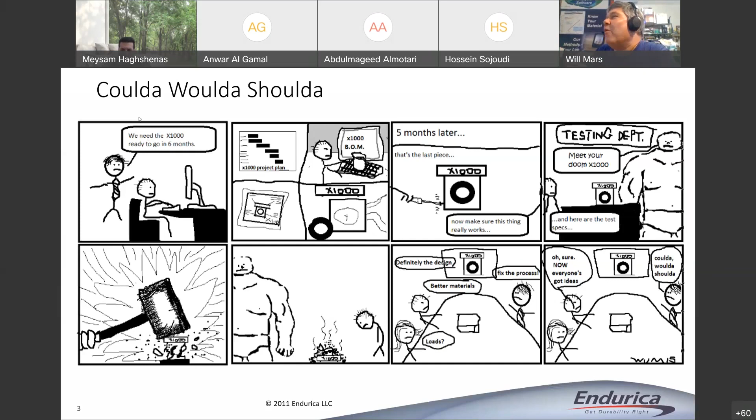Because otherwise, when you get to this meeting, now you have to go back and do another iteration, and that's expensive, and nobody likes that. So anyhow, you don't want to be in the coulda, woulda, shoulda, right? You want to get it right the first time.

Now, the other real world experience, I guess, is that every project that you're ever going to have is going to come with limits, right? And I just picked off some funny cartoons from the internet here that kind of illustrate this, right? Your client expectations versus your client budget. What kind of weapon do you bring to what kind of situation? It's important to bring the right tools to the right situation, let's say.

And of course, there's always going to be a deadline where, if it takes you longer to do the development than the schedule allows for, there's going to be problems. So the question is, well, how do you go about sort of aligning the objectives that you have in a development program against the activities that you need to do, the kinds of analyses, the kinds of testing that you need to do?

And what I want to say is, hey, in fatigue design, there's a huge range of tools in the toolbox, and so we need to think about the design intent and the requirements. That's basically going to be your budget and your deadline, right? And it's going to be the functional specification on what your product needs to do, and then we can break this down further into what are we going to do from the perspective of describing the behavior of the materials.

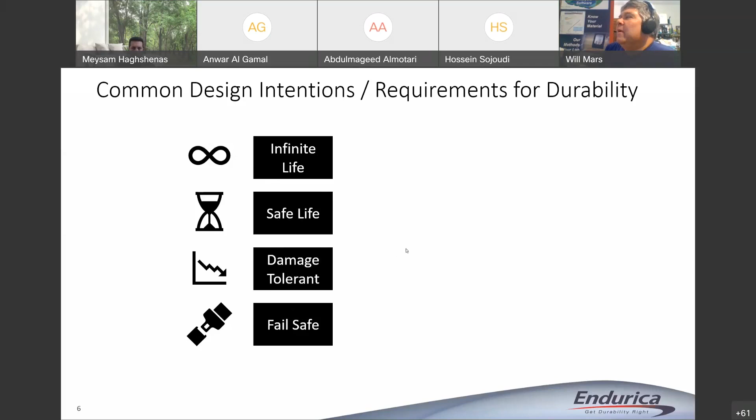Now, the simplest one is the infinite life approach. And in the infinite life approach, what we say is, hey, look, when we design this thing, we are not going to allow for the possibility of damage. And so in order to use this approach, we need to know, first of all, what's the fatigue limit of the rubber, right? There's some load below which, if you keep the load below a certain limit, then cracks don't grow ever.

Now, in order to apply this, you need to know what that limit is, and you also need to know C naught. So C naught is the crack precursor size, right? All materials contain initial cracks in the microstructure, and so if you're working with rubber, and if you know this fatigue limit, if you know the precursor size, that puts you in a position to calculate basically a crack driving force, right? An energy, if you've taken fracture mechanics, energy release rate is what we use. And you can compare your energy release rate to that fatigue limit.

And if your driving force on the crack is below the fatigue limit, then you have infinite life. And you can calculate this safety factor S, right? It says, hey, I've got a margin of 2 times relative to infinite life, or I've got a margin of 10 times, and then you're done. And like I say, cheap approach, because you only need to test one or 2 things. Your finite element model only needs to look at the worst case loadings, and what you end up with is just this simple measure S.

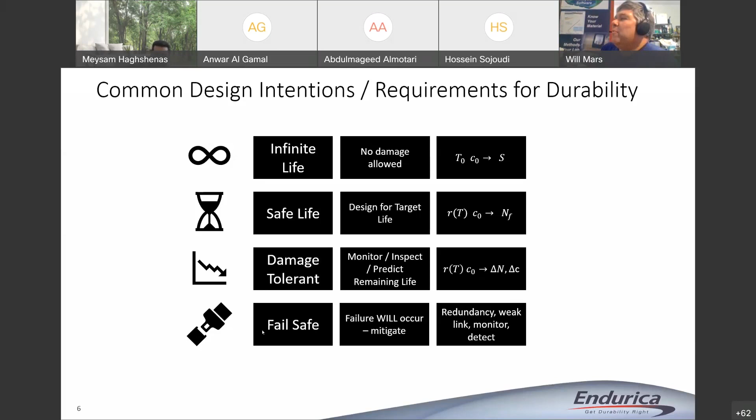Now in rubber, I'll just briefly, one of the things that makes rubber different from metal in terms of fatigue parameters is material behavior. And so, like I say, you sort of have to sort the material behavior into categories of, well, there's some things that you always need to know for every single analysis you might ever do. And there's other things that maybe you only need to know in certain applications, right? So for sure, the basic mechanical behavior that we would always want to know is stress strain behavior.

So, in rubber, we're very concerned with the nonlinear elastic properties of the rubber. So we use hyperelasticity. We're concerned with steady state cyclic behavior when we're working with fatigue. We're also concerned with what I call the core fatigue behaviors. So basically that would consist of a crack growth rate curve, and it would consist of a crack nucleation curve. So we do both of those kinds of experiments in order to prepare for doing analysis, and that's kind of the basic level.

And then on top of that, you can add what I would say is common behavior, but you don't always have to think about these things. Sometimes in certain applications, the thermal dependence, rubber can, if you cycle it fast, it can self-heat. And so sometimes you have to think about that. Sometimes you have to think about the dependence of the crack growth rate law on temperature. So those are things that can be characterized.

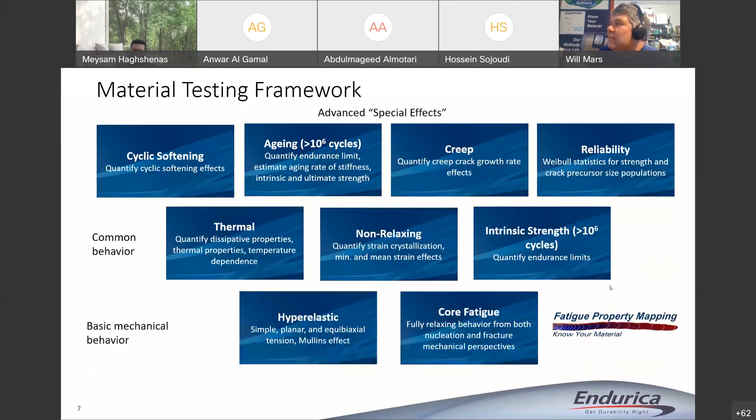But so you might start off with the basics, and then depending on the objectives and the budget, you might add these other things in as part of your study of how the material behaves. Now here's a list of what material characterizations you might do in each of these categories, right? So I've color coded these. Things that are green are kind of like bare minimum. Things that are yellow are things that you could add at an advanced level.

So, for infinite life, you need to know stress strain behavior and intrinsic strength. And maybe if you want to add to that, you could also look at reliability. If you're doing a safe life type of analysis, you're going to have to know more about the material. So here we need not just the fatigue limit, but we also need now the crack growth rate curve, the crack nucleation curve, and then maybe some of these other effects, right? Thermal effects, crystallization effects, creep, for doing safe life.

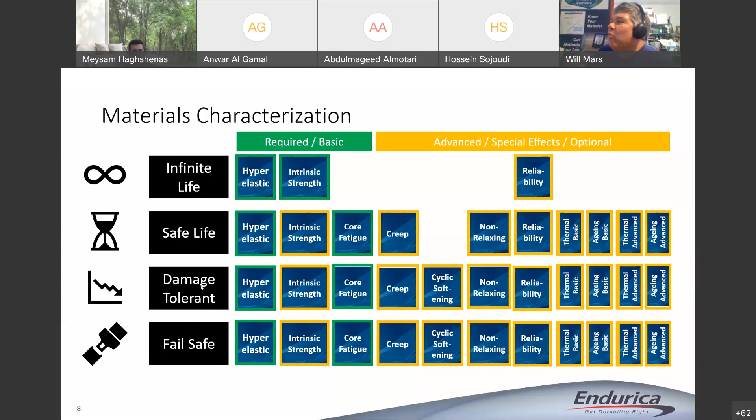If we're going to do damage tolerant, now maybe we have to take into account the cyclic softening, because the material is going to get softer, which means I have to recompute my stresses and strains on some kind of incremental basis, right? Every 100,000 cycles, I have to update my finite element model to reflect the fact that the stress strain curves have become softer. And so you can sort of see how these different characterizations get more complicated and scale up as you adopt more and more sophistication into your analysis.

So now, that was just materials testing, we also have to think about analysis tools. And of course, if you're doing this kind of work, you're probably using a finite element solver like Abaqus or ANSYS or MSC Marc. Those are not our tools. Our tools are these tools here, CL, DT, and EIE. Those are the Endurica software products. And each of these tools has a different workflow.

The CL workflow is the workflow that we use if you give me a duty cycle, and if you ask me how many repeats of that single load case can the part endure, that's the situation where I'll use the CL solver. It was the very first solver that we wrote, and so that's kind of the basic tool set. The next one is our incremental solver, and we call it DT. It should make you think of like an increment of time, right? Delta T.

This is the workflow that we would use when we have to accrue damage across different load cases, right? With CL, I can only have a single load case. With DT, I can make a schedule of cases, and I can accrue damage as you go further and further into the problem. DT also allows you to do a co-simulation, which means that you can sort of iterate between your finite element solver and your fatigue calculation, so that you can update stress strain fields based on how material properties are evolving as cycles accrue on the part. So those are things that we can do with DT.

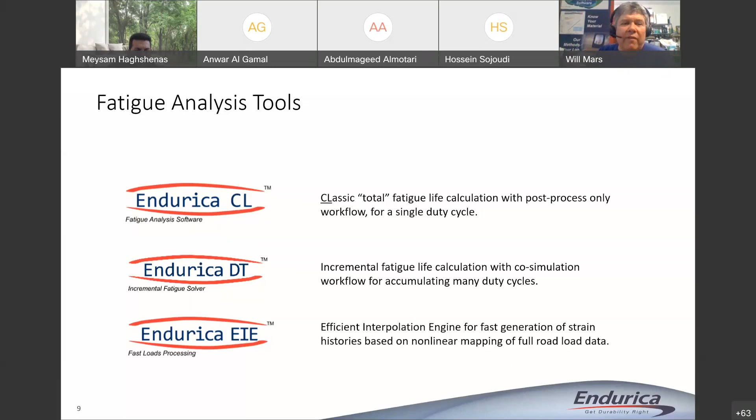So very powerful tool, and yeah, those are the 3 things that we use. And here's kind of a chart that shows how these different workflows map onto the different levels of analysis depth. So if you're doing the infinite life approach, you're probably just going to stick with CL, because you're probably just going to calculate a safety factor.

If you're doing safe life, maybe you'll use CL, because you can get repeats of a single load case, but sometimes you're going to want to model what's called a block cycle schedule, which is, again, you sort of say, here's load case A, so many repeats, load case B, so many repeats. You specify that schedule, you run the part through that schedule, and at the end of it, you say, oh, it didn't break yet. How many repeats of the whole schedule can I run? So that's still a safe life type of thing, and you can do that with our incremental solver.

With the damage solver, like I say, you can do this incremental style of analysis so that you can monitor the growth of defects in the part. You can also use DT to look at residual life in the part, right? So another type of problem is, hey, here's the history that's happened so far. If I assume that this is going to happen in the future, how long will it last? That's what we call residual life, right?

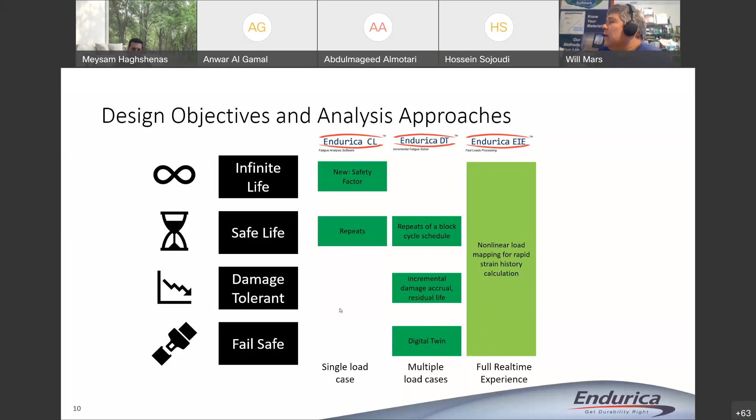And then finally, if you're trying to do a digital twin, then you want to do this with our DT and our EIE tools. And what's beautiful is these tools run fast enough, especially with EIE, that you can actually do this in real time these days. Okay, so that's kind of an outline of everything.

Here are some of the scoping questions. As you're deciding which pieces of these you want to bring together, you're going to say, what's the implication of a failure, right? Because what you're looking to do is economically justify the activity that you're going to do. And so the first thing to say is, well, if this thing fails, what does that cost somebody, right? Sometimes if it's a little rubber grommet that fails, well, it's a $1 part on a dollar problem and nobody cares.

Other times we've had projects where there's a rubber part that's off in the middle of the ocean, and if it fails, they have to send a ship out to change the part. And if you can imagine sending a ship with a crew and all of the equipment it takes to change a rubber isolator on an oil platform, you're talking multi-millions of dollars. So that's one of the first questions to ask when you're trying to scope what is justifiable.

You also want to think about opportunity costs. What's an example of that? It's like, if we do this, maybe that opens a future possibility that has a lot of value that could be realized. And so sometimes opportunity costs are important to think about.

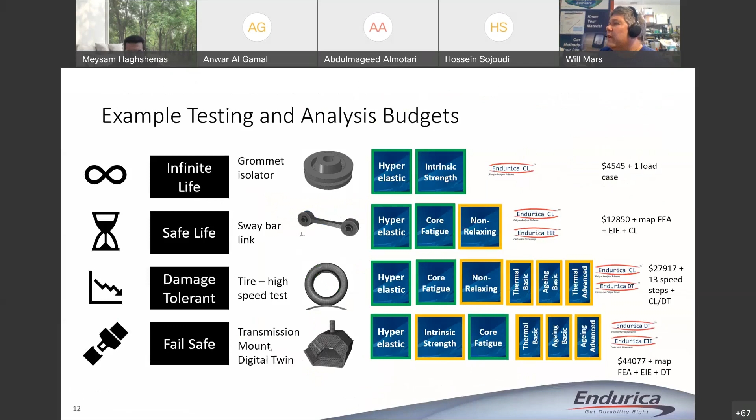And then finally, I want to show you an example of what a digital twin could look like. It's kind of academic at this point, in the sense that we actually haven't sold that. I'd love to find a customer who wants to do it. A lot of people are talking about this these days. I think in the future we will see more digital twins coming, and we've built a prototype one that I'll show you here, but certainly possible to do. And the example I'll show you is for an automotive transmission mount.

Okay, so talking about infinite life. This is a picture of rubber's fatigue crack growth rate curve, right? On the high end, you have the strength of the material Tc. On the low end, you have the fatigue limit T0. And in between, you've got this green curve that controls, for a given fracture mechanical energy release rate, what is the rate of growth of the crack. Now if you're in the infinite life approach, the only thing you need to know is this lower bound, right? I don't need to know anything about the rest of the curve. I just need to know that lower bound, and I need to make sure I'm below it.

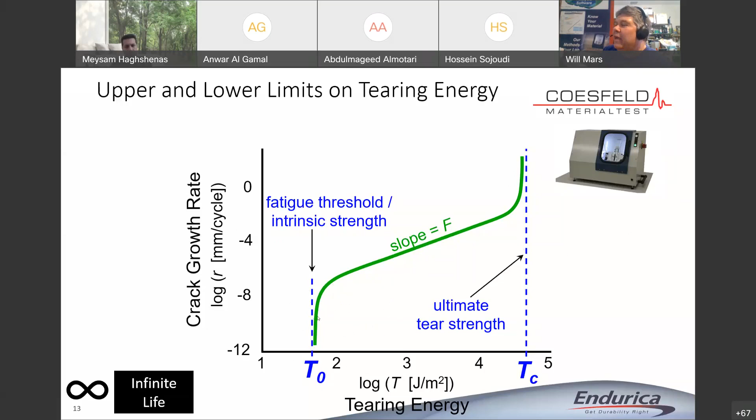The way we do that is on the analysis side, we use an analysis method called critical plane analysis. The idea in critical plane analysis is, loads can be very complicated. A stress tensor has 6 different components, and so as you're feeding loads into a part that are coming from multiple directions, the question is how does a crack on a particular plane experience those loads? What you do is you resolve the stress tensor onto that specific plane, and you look at the history of the traction vector. And from that history of the traction vector, you can find what's the worst case.

And you can compare that worst case to the crack precursor size. So in the infinite life approach, we make this calculation of the traction vector on every plane. We scan over every single possible plane, and we calculate a safety factor on every plane. And then the plane that gives you the smallest safety factor, that is the safety factor that we report as the safety factor of that particular element.

And we do it for all the elements in a model, and that tells you whether your part is going to pass or fail that particular set of conditions, right? So this is just the critical plane search, scanning through different possible crack orientations.

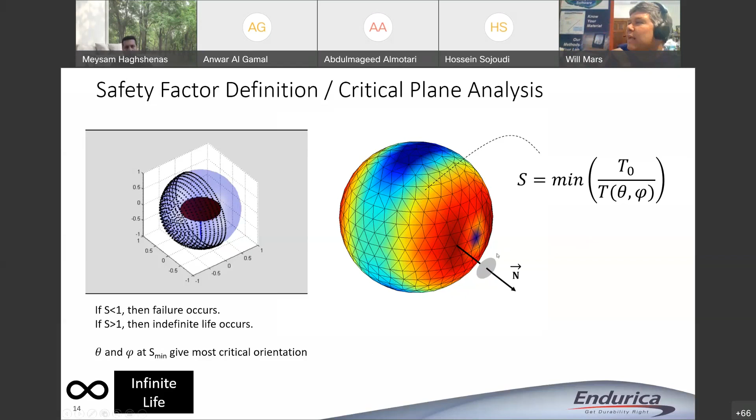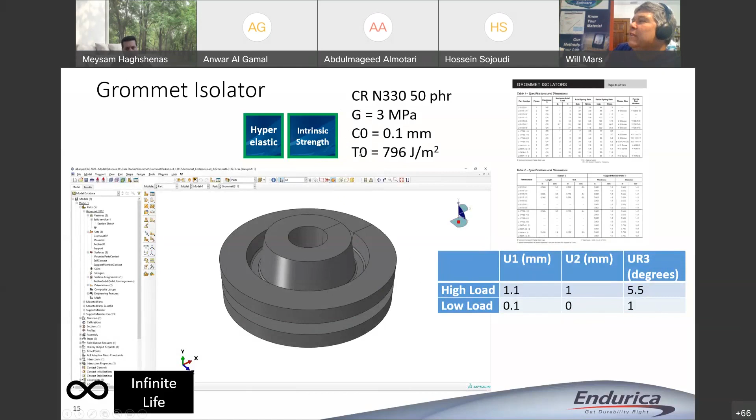So here's my grommet example. In this case, we're going to model 2 loads. One is going to be at a low load, and one's going to be at a high load. We're just going to measure the stiffness of the rubber, the precursor size of the rubber, the fatigue limit of the rubber. We feed that into these calculations, and here's what you get.

If you see red, that's a safety factor of 1.0. If you see black, that is where the safety factor is below 1, right? So that's not infinite life. Everywhere else is infinite life, and blue is a very large safety factor. Red is just on the line.

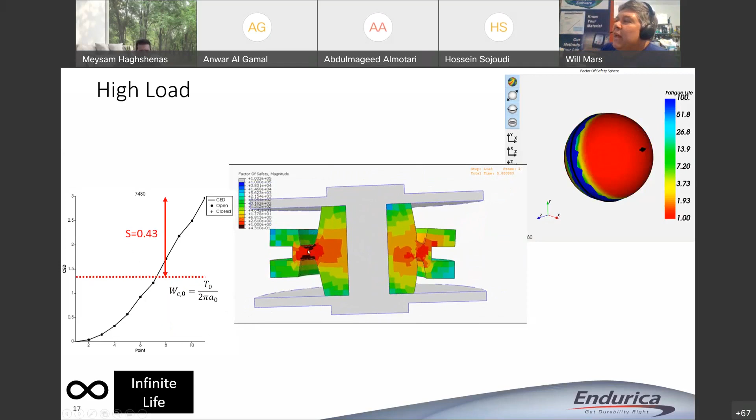life limit. If I repeat the analysis for the high load case, now you can see I've jumped over the fatigue limit, and I've got a couple of elements here that are colored black, and those elements have a safety factor of 0.43. So this doesn't mean that the part has failed instantly, but it does mean that the life will not be infinite. And this does not tell you how long the part will live.

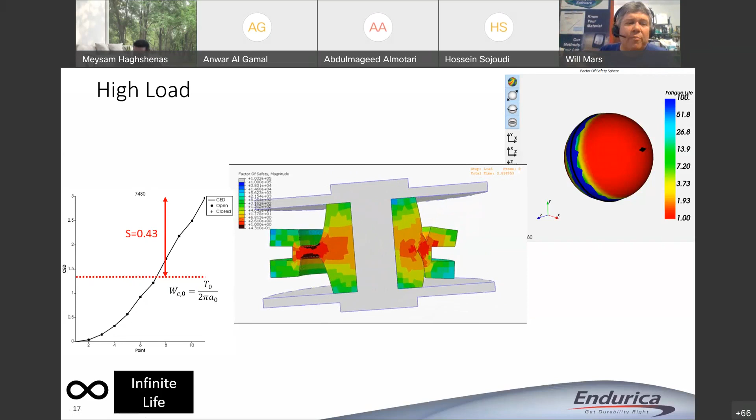If we see the black elements, that means maybe we need to do the safe life approach, or redesign the loads or the part or something. Right, so that's a little bit about the infinite life approach.

Here is the sway bar link. And we're going to do a safe life analysis on this. So here's an example of the material characterization we might do for this, right? So we have stress strain curves, we have fatigue crack growth rate curves, we have a crack nucleation curve.

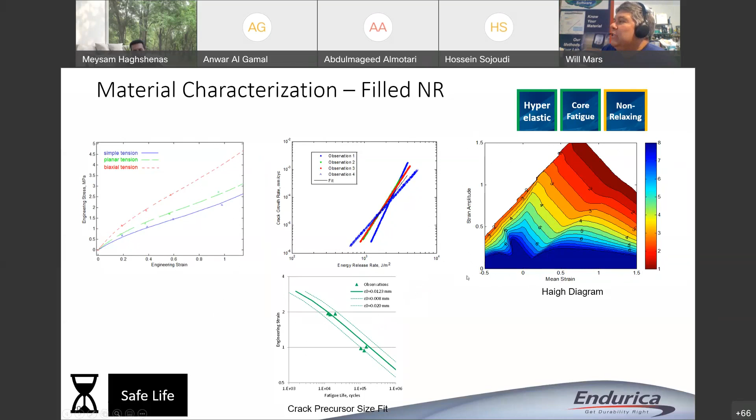From these 3 pieces of information, we can computationally generate rubber's Haigh diagram, which is a map showing how the fatigue life depends on the applied mean strain and the applied strain amplitude. That's the materials characterization that we would do.

And if, for example, we wanted to model a uniaxial load, right? Since this is just a link, this link gets loaded uniaxially. So we can just look at the displacement history, maybe from a road load recording. Now, since these are road loads, we don't want to feed this road load directly into the finite element model, because that would just take way too long.

What we're going to do instead is we're going to compute a map, right? So we're basically going to take the part, we're going to load it from 0 to 4 millimeters of displacement. And in this case, we're going to do that in about 8 increments. Those 8 increments of loading create a one-dimensional map of the relationship between stress strain fields in the part and force displacement input to the part.

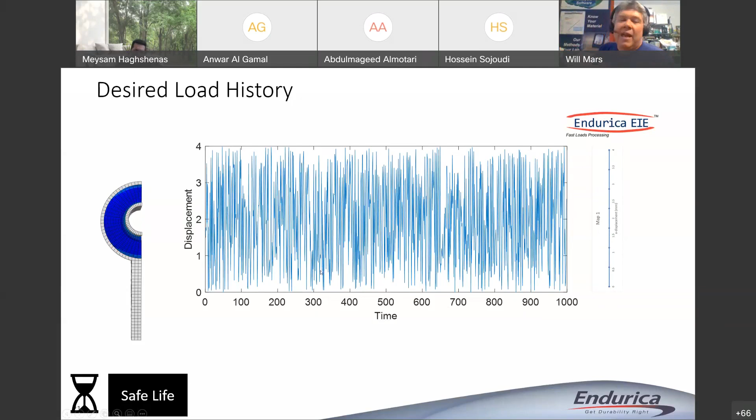Once we have this map, the EIE tool can say, okay, for any point on this history, if I'm here, I'm just going to look at these 2 load cases and I'm going to interpolate between them, right? So then to generate this, I'm going to use my map. I'm going to sort of remix it, interpolate it, and then generate this big history. And I can use that for my fatigue analysis. And if I do that, I get some sort of life.

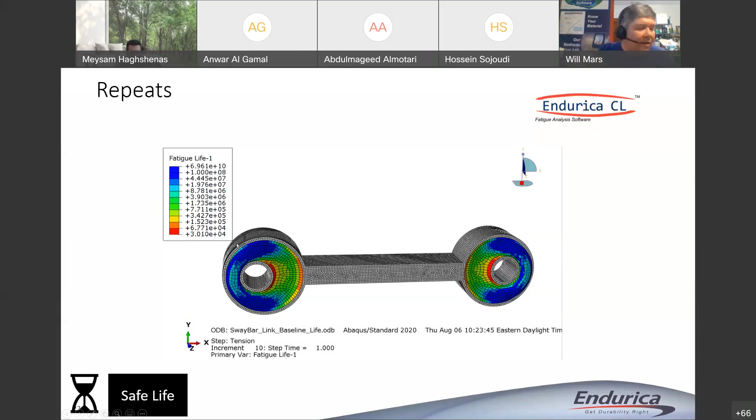These are life contours on the part under that road load history. In this case, we get a life. The failure is going to be near this inner metal contact point, and it's a life of about 30,000 repeats of that event at the track. So that's an example of a safe life analysis on the link.

Here's an example from the tire world for the incremental analysis. This is the FMVSS procedure and the ECE. By the way, there's 2 procedures here actually. The first is the FMVSS, which is if you want to sell a tire, you have to pass the first 4 steps, right? If it doesn't pass the first 4 steps, that tire is illegal in the United States.

Now, in addition to those first 4 steps, there's a European test standard that tire companies use to assign a letter grade to a tire. If you buy a tire that has one of these letter grades at the end of the tire nomenclature, that is an indicator of what's called the speed rating of the tire, right? So if you have a Q speed rating, that means the tire was able to pass 160 kilometers an hour. If you have a Y speed rating, the tire is fine up to 300 kilometers an hour, right? You better be on the Autobahn for that one. But so the question is, can we model this?

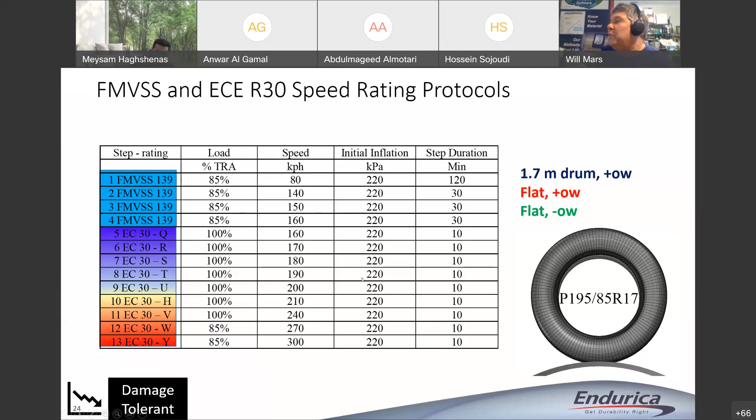And yes, to do that though, we're going to need to use an incremental analysis where we say, okay, run this load case for 120 minutes, and then run this load case for 30 minutes, and this load case for 30 minutes, and so on, up until the tire lets go, right? When the tire lets go, that basically gives you your letter grade for the speed rating. And we can simulate that.

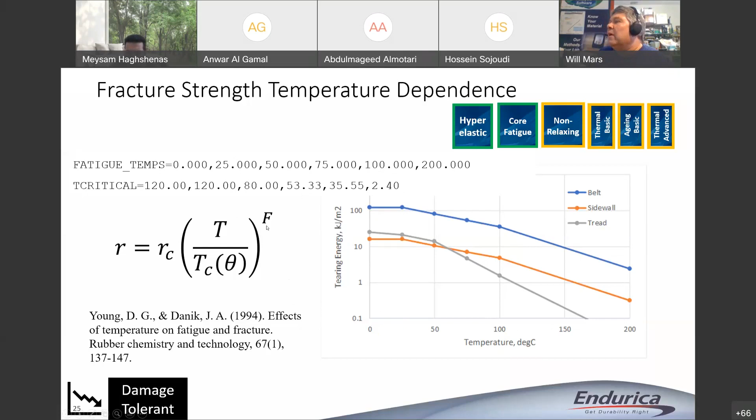But once you hit about 210 kilometers an hour, you start to have some really interesting dynamics, because in a tire, you get what's called a standing wave, where the rotation speed of the tire corresponds to some natural frequencies in the structure. And you actually, at steady state, get these standing waves, very destructive to the tire, because prior to a standing wave, you really have one deformation cycle per tire revolution. Once you get a standing wave, you get multiple cycles of the rubber per revolution of the tire. Very damaging, and this is where you'll see a large amount of self-heating.

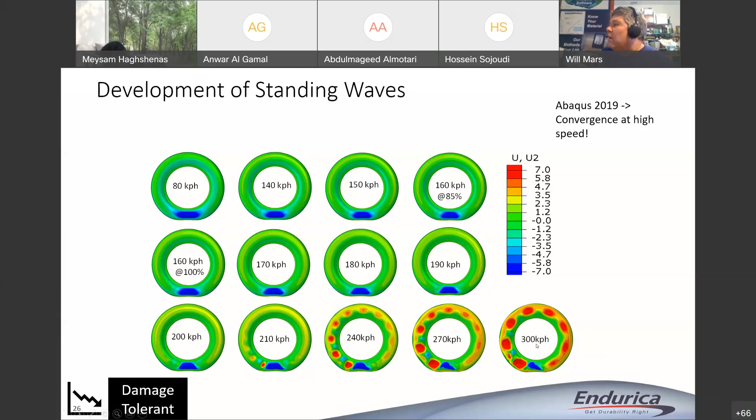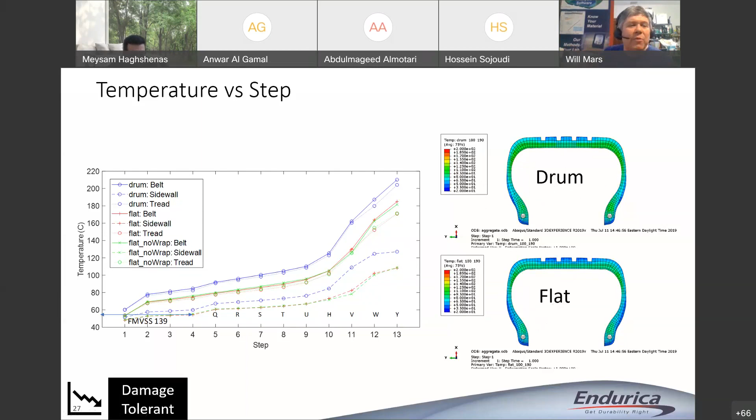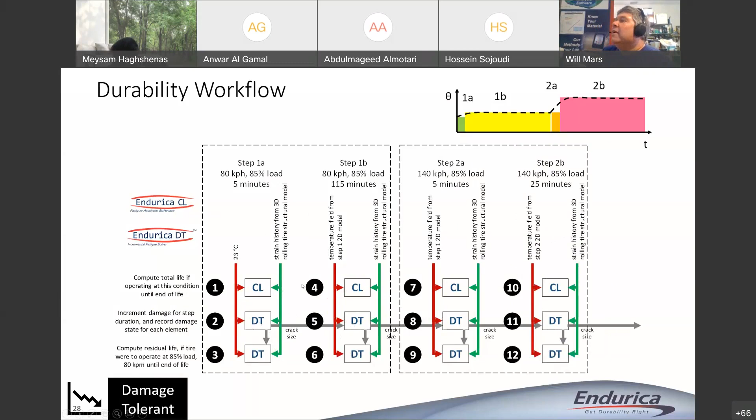This is the workflow, and I don't dare try to explain it. You know, the incremental workflow does get a little bit complicated because you're kind of starting and stopping. You're saying, well, do damage for this step, and then take the damage state of the tire and do another step, and the end of that step becomes the beginning of this step, and bring all the temperatures in, and it gets intricate, but it can be done is the point.

And here's kind of the final result when we follow that workflow. What we get is a plot of residual life as a function of time into the sequence of tests in that schedule for the FMVSS and for the speed ratings, right? So if you survive for the first, what is that, 13,000 seconds, that means you've passed the FMVSS 139, and then you can see these are the points where you pass the Q, the R, the S, the T. Now in this case, these models were failing at the H and V speed steps in the procedure.

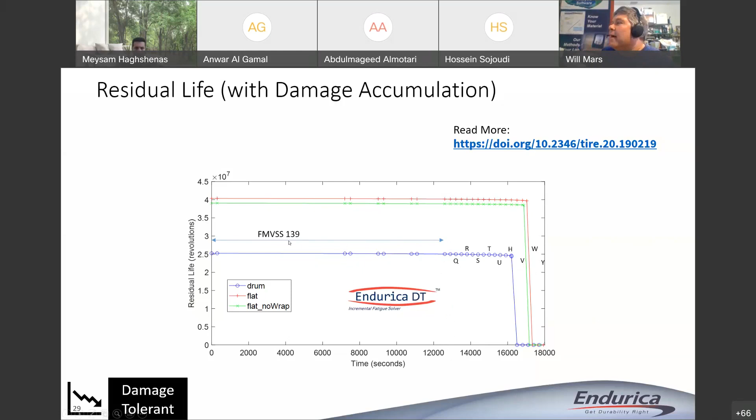Interesting prediction of speed ratings in tires using our fatigue technology. Last example for the fail-safe approach. This is an example where we've implemented a digital twin of a transmission mount, an automotive transmission mount.

And the way the twin works is basically you have a car and a data acquisition system that's measuring force and displacement inputs to the transmission mount. We're going to use EIE, right? This tool that interpolates loads. We're going to take those real-time loads, and in real time, we're going to convert them into strain history.

And then we're going to use the incremental solver to take that strain history and say, okay, over this 1 minute of strain history, how much damage happened? We're going to update the damage state of the model, right? We're going to accrue the actual damage, and then we're going to do a second calculation.

We're going to say, okay, since I've accrued this much damage, what does that mean in terms of change to the residual life under some hypothetical, right? If we say we measure the life of the part in terms of 100% load, we can compute the residual life. So we do these two calculations in real time, and then we update a dashboard where I show maybe a driver or a fleet manager, here's what the damage on your part looks like.

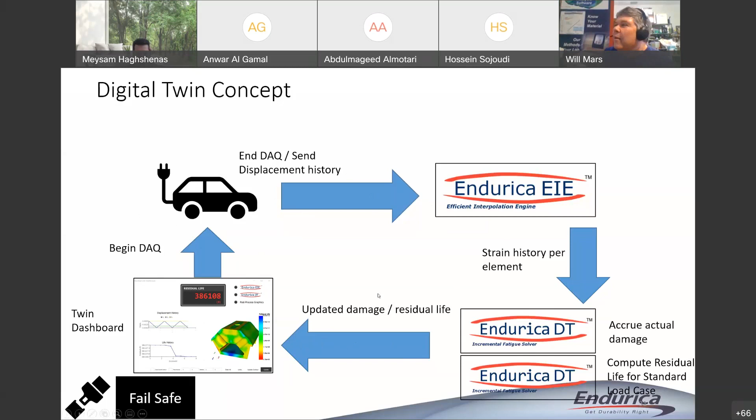And now, of course, this basically happens on a periodic basis, so every minute or every hour, you update this calculation loop. And so you basically have a running dashboard of the state of your part. And if you accrue enough damage that the part is going to fail tomorrow or next week, you can send an email to somebody and say, change that part out. So that's an example of a predictive maintenance system or a digital twin.

And so now, in order to use EIE, first we have to pre-compute the solutions that we use for interpolation. So this is a picture of a final model going through the motions that are used to pre-compute the interpolation grid, right? So basically you make a model of the mount and you run it through every possible deformation state that might happen in the application, and that's your map. Now that's a thing that you do before you get to the field and start operating the twin. Once you've done that, then you're ready to go ahead and start the twin.

I guess the other thing we need to do is, so first of all, we have to pre-compute the map. Second of all, we have to initialize the residual life, right? So how do you measure residual life? Well, you pick a standard load case and you say we're going to measure residual life in terms of repeats of the standard load case.

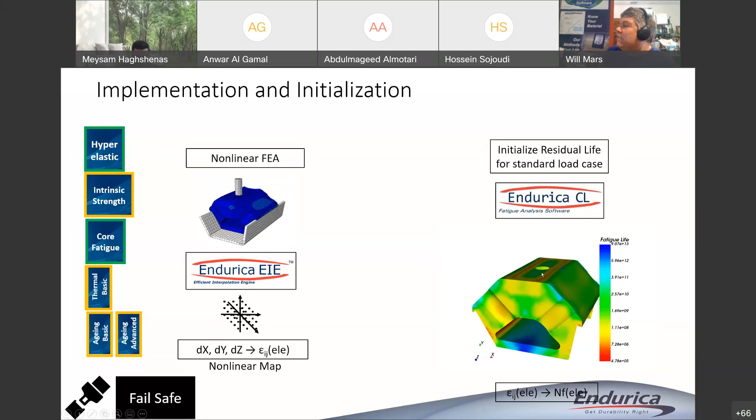So the first thing we're going to do before we accrue any history, we're going to say what is the fatigue life of the standard load case before we've accrued any history. So we need to initialize that before we start the twin up. And this is a contour plot showing the fatigue life on the mount of a load case where we're just doing vertical vibrations, right? We assume the major thing going on are these vertical vibrations. So now that we've initialized that, we can get in.

But if you're interested, go to the Endurica YouTube channel and look up Digital Twin, and you'll find this demo on our YouTube channel. Basically, we feed in real-time loads, and this map of damage updates in real time as we feed in snippets of loading. So you can see that, and you can see the computational requirements of the twin prototype.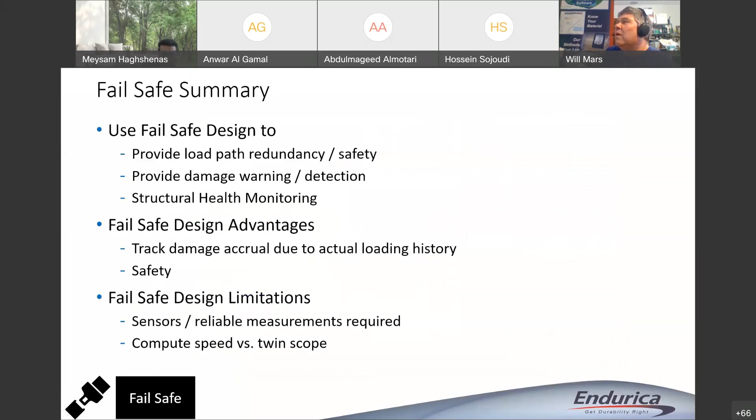So yeah, so these are the approaches, and you can see that we've gone from very simple to very sophisticated, and hopefully you can find something that matches what you need to do. So I will stop there and open up for any questions or discussion that you guys may want to have.

Perfect. Thank you so much, Dr. Mars. Excellent presentation. I personally loved it because my mindset is all about metals and alloys. Very informative to me. I learned a lot. Thank you so much. I have a couple of questions which I can ask at the end. I let the students and other faculties, if you have any question, please feel free to ask, because I do not yet see the questions here. Hussein, do you see something? Thank you very much, Will. I see some questions. Okay, go ahead, please. I can't see them. Go ahead. Yes. Thank you very much, Will. Very interesting talk. I have a couple of questions, but they can wait for the end.

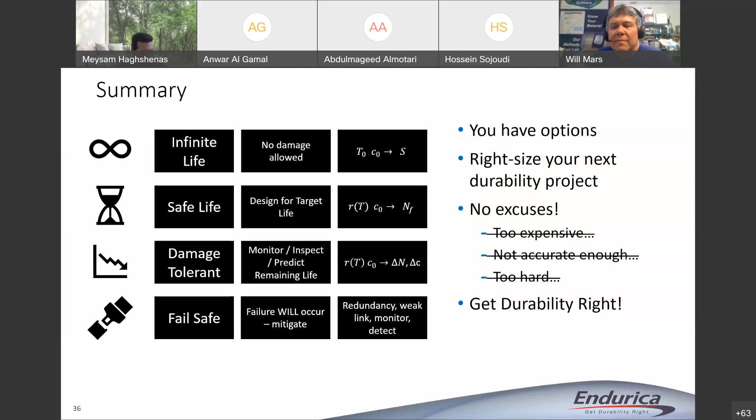So yeah, okay. Bilal has a question: when you talk about all possible loads, how are you defining the boundary condition? In particular, how are you defining the movement of the rod? Yes, in the case of this transmission mount, this is all under displacement control. Now, this very much depends on the application. These tools will allow you to do it in displacement control or force control, or if you want to mix and match, one channel displacement and one channel force, that's fine too.

But the important thing is that what you do in your finite element model should match up with the inputs that you're getting from your data acquisition system. So if you're measuring displacements, you want your finite element model to be displacement based. If you're doing forces, you want to use forces. In this case, the mount is fixed on one end. You can see it's glued on the bottom, and then that rod is basically treated as a rigid body. It's tied to a single control node through which we input X, Y, Z displacements. Good question.

Okay, thanks. And a follow-up question: are those jobs explicit or implicit? In this particular case, this was implicit. We support both paths. In fact, I've got another really interesting work that we did with tires using a combination of implicit and explicit. We used implicit to model steady state rolling on a tire, and then we used explicit to model the impact of the tire with an obstacle.